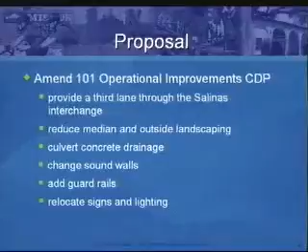This proposal is to amend the Highway 101 Operational Improvements Coastal Development Permit. This project is otherwise known as the Milpas to Hot Springs project. This amendment would provide a third through lane through the Salinas interchange. It would also result in a reduction in median and outside landscaping. Concrete drainage would be undergrounded and culverted with the project, and sound walls adjacent to Salinas Street would be changed as part of this project to provide for appropriate sight distance. The project also involves new guardrails and relocation of signs and lighting.

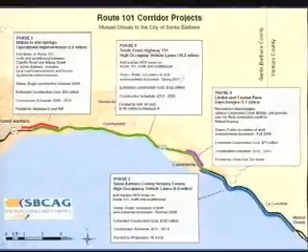The Operational Improvements Project is the first of 4 projects that would lead to the eventual 3-laning of Highway 101 between Milpas Street and Mussel Shoals. The other project within the city's jurisdiction that your commission was briefed on previously is the High Occupancy Vehicle Project, or HOV project. This project extends in the city's jurisdiction to Olive Mill, and there is overlap between the Milpas to Hot Springs project and the HOV project. Much of that overlap would be addressed with this coastal development permit amendment.

A contentious aspect of this project has been the reduction of landscaping from the approved project. The median planting would be reduced for about 0.43 miles. The approved project has a 10-foot median, from the outside of the barrier face to the outside of the other barrier face. That width would be narrowed as part of this project, in the smallest section down to 3 feet 3 inches. Accounting for the actual width of the barriers, it's approximately 2 feet 8 inches between those barriers. The project would also result in the removal of 3 oak trees and 2 eucalyptus trees that are part of the approved landscape plan, and reduce shrubs along the sound wall.

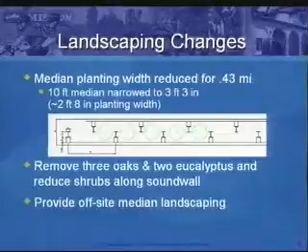Benefits of this project include furthering the city's goal of congestion relief on Highway 101. This congestion relief would occur 5 to 10 years sooner with this project than it would with the eventual successor HOV project.

The subject project would also reduce construction impacts to this section of 101, because the section would not need to be revisited with the HOV project. Also, according to Caltrans, there would be significantly reduced overall costs, and there are currently additional funds available to do this work now.

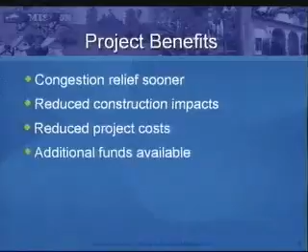In order for your commission to approve this amendment, there are coastal development permit findings that you would have to make: that the project is consistent with the policies of the Coastal Act and all policies of the city's local coastal plan, implementing guidelines, and provisions of the municipal code. I'll briefly cover three pertinent policy groups that were also covered in the staff report.

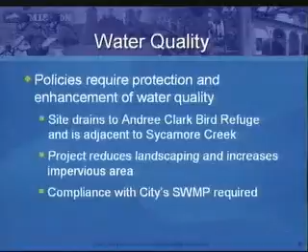The first is water quality. There are policies in the Coastal Act and the local coastal plan that require protection and enhancement of water quality in the coastal zone. This project site drains into the Bird Refuge, and it's also adjacent to Sycamore Creek. The project would result in a reduction of landscaping and an overall increase in impervious area, but staff believes that compliance with the city's stormwater management program would ensure compliance with these policies.

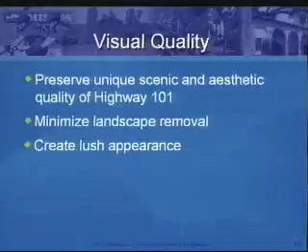The local coastal plan also includes several policies related to visual quality that are specific to Highway 101. They are to preserve the unique scenic and aesthetic quality of 101 in general, also minimize landscape removal, and create a lush appearance.

I just wanted to backtrack to the coastal access policies. There are policies in the local coastal plan, and also the circulation element and pedestrian master plan, that offer guidance to provide a new pedestrian access across this segment of Highway 101, essentially between the east side and the zoo. Both Caltrans and SBCAG have expressed support of providing access at this location, and SBCAG is committed to seeking funding to study a pedestrian crossing at this location.

So returning to visual quality, the Highway 101 Coastal Parkway Design Guidelines were adopted by the city to implement the local coastal plan. The stated intent of the design guidelines is to maintain Highway 101 consistent with its historic character and allow necessary traffic and safety improvements. It does provide a lot of guidance on landscaping and requires that a design review team review any projects within the coastal zone that are in the 101 corridor.

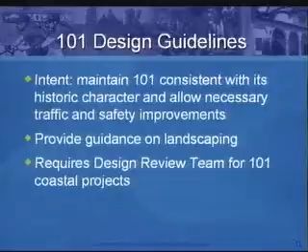For this project, a design review team was formed, including members of the Planning Commission, Architectural Board of Review, and Historic Landmarks Commission. The design review team reviewed the project on November 9th. There was a site visit on November 17th and another review on January 12th. The consensus of the DRT for the project they reviewed was that the reduction of landscaping was not acceptable, and that a wider median was necessary to support the appropriate plantings. Members also expressed concern regarding the reduction of the outside plantings.

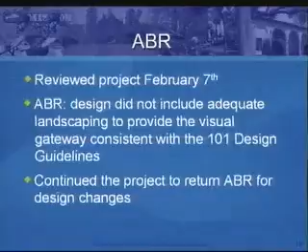This project is in the jurisdiction of the Architectural Board of Review, who reviewed this project once on February 7th. ABR stated that the project didn't include adequate landscaping to provide the visual gateway consistent with the guidance of the 101 design guidelines, and continued the project on a 7-0 vote back to ABR. Due to time constraints on the project, Caltrans has elected to proceed to your commission before going back to ABR, but has added plantings adjacent to the sound wall and has also proposed off-site median landscaping improvements. ABR and the design review team have not reviewed those changes.

So the difficulty is essentially that there are two ways to provide additional landscaping in the right-of-way. One is right-of-way acquisition, which Caltrans has said is not feasible due to the constraints of this section of 101. Union Pacific right-of-way abuts the Caltrans right-of-way, and there is low-income housing in the trailer parks adjacent to Caltrans right-of-way on the other side.

The other way to provide additional landscaping is Caltrans approving design exceptions like narrower shoulder widths or lane widths. This is an internal process at Caltrans. Caltrans has recently stated that design exceptions are not available for this project at this location due to concerns about worker safety.

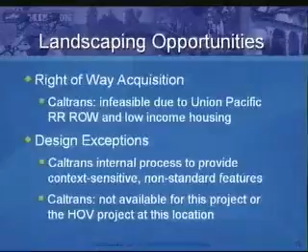Staff has had trouble reconciling this information with the visual policies and guidelines and direction by the design review team and ABR. So staff is therefore not making a recommendation on this application either way.

Staff does believe there's sufficient information for the Planning Commission to act on this application, and approval findings, including CEQA findings, are outlined in Exhibit A of the staff report. Denial findings are also provided in Section 8 of the staff report.

Briefly on environmental review, for the operational improvements project, Caltrans is the lead agency. The EIR for the operational improvements project was certified in March 2004. There was an addendum prepared for project changes before the city took action on the project in December 2004. For the subject project, Caltrans prepared an addendum in February.

That addendum found that there are increased wetland impacts from culverting the concrete drainage ditch. Essentially, the ditch filled with some silt and some wetland plants started growing in the drainage ditch. It was not intended to be a landscaped drainage. So the mitigation would be 1-to-1 at some location along Sycamore Creek, and the area is approximately 800 square feet.

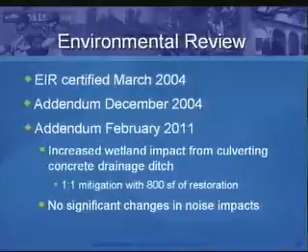Exhibit A also includes staff recommended conditions in case the commission chooses to approve the project. They include a condition for wetland mitigation, compliance with the city's stormwater management program requirements, landscape maintenance in perpetuity, and a requirement for design review submittals for the off-site median landscaping improvements.

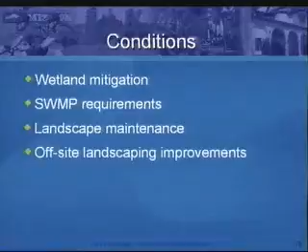Unless Mr. Cato or Mr. Dayton have anything to add, that concludes staff's comments. We have members of the design review team. Phil Suding is here and Judy Arias is here, representatives from the Historic Landmarks Commission. Also, I believe Paul Zink is here representing the ABR. And for the applicant, Greg Hart is here from SB CAG. David Beard is here from Caltrans, he's the Caltrans project manager. And Dave Emerson is the Caltrans landscape architect, and they will be presenting for Caltrans.

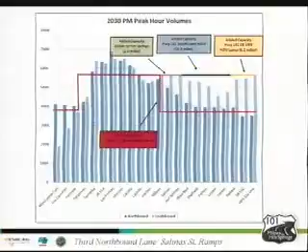This chart shows the intersections that connect with the freeway. On the far right-hand side of the chart, over here is the Ventura County line, and out here is Winchester Canyon, Goleta. Each of these are the various intersections in the north and southbound direction, and this is the capacity of the freeway, the red line.

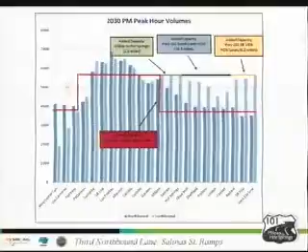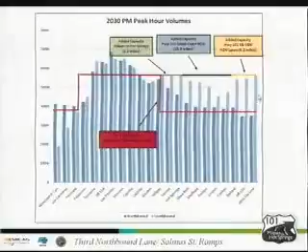There's 2 lanes out in Goleta coming back toward Patterson, goes up to 3 lanes to the city of Santa Barbara, and then down to 2 in Milpas. You can see all of this traffic volume here that's above the 2-lane capacity will create the queue I was talking about. It doesn't need to occur in all of those sections - all it has to do is occur at one point in space, and you get a bottleneck that backs up through the entire corridor.

So what we're trying to do is provide capacity to accommodate that, and that's what this additional third lane is intended to do. Even out in 2030, with traffic volumes, you can see this will do a very good job of addressing it, but it isn't sufficient by itself.

We went through a very, very long process with the community through the 101 in Motion planning effort, where we came up with a consensus that determined we needed to widen the freeway with a carpool lane - not just any lane, but a carpool lane to facilitate transit and carpool usage. But we also have to invest in rail transportation and interregional transit, and we'll talk a little more about that later. Frankly, those strategies are particularly important for this section.

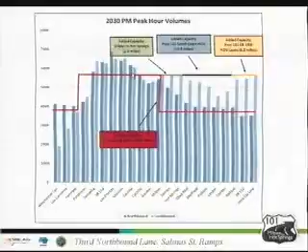We do not have a capacity solution for the congestion that's going to grow within the city limits itself. We have to treat that through alternative transportation, and the carpool lane is really the linchpin of that effort. Dan touched on this very quickly.

The project you're looking at today is a subset of item number 4, the fourth phase of our overall strategy to widen the freeway. The first phase is under construction, scheduled to be completed about the end of this year - it's the first 2 miles from Santa Barbara down to Montecito.

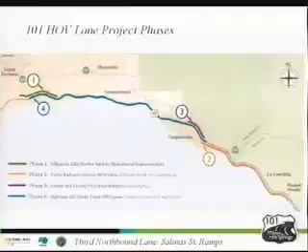The second section is actually going to begin construction later this year as well. That project's been fully funded. All the permits have been granted from the Coastal Commission, the City of Carpinteria, and the County of Ventura. It's about a $130 million project.

We'll begin down at Mussel Shoals and add a carpool lane. For the first time, this is where you'll actually see the diamond lane on the freeway, coming all the way up to Carpinteria Creek. The next phase is in Carpinteria itself.

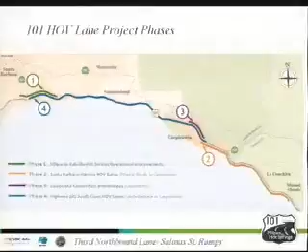It's phase 3. We have to replace the Linden and Casitas Pass overpasses in order to accommodate the additional freeway lanes into the freeway. One of the things we are trying to do is take what we think are going to be cost savings from the second project.

The bid environment is actually pretty good right now because of the recession, so we think we may have as much as $20 million in savings on that project. We're hoping to get permission from the California Transportation Commission to apply those cost savings to Carpinteria, taking advantage of another opportunity to make sure that project is fully funded and staying on track.

We're going to be getting permits from the City of Carpinteria hopefully later this year. All the environmental work is done, and that project is queued up to begin construction about the time when Phase 2 finishes.

So then we're left with the big, long 10-mile section, essentially from Carpinteria back up to the section we're looking at, too. You can see the blue line overlaps with the green line up here in the city of Santa Barbara because we have to come back for the Salinas Ramps project. So what we're hoping to do today, with your permission, is get approval to do that section so that we don't have to come back and redo that work at a later point in time.

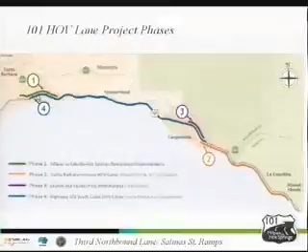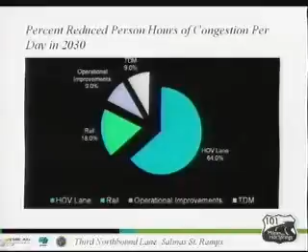I mentioned briefly that this strategy is part of a multimodal solution to the congestion on the freeway. The HOV lane produces about 65% of the benefit we're going to need from a traffic reduction standpoint, primarily because we're able to use carpools, van pools, and the interregional bus system we have in place will be able to use that lane.

Right now today we have the Coastal Express bus service that operates between Ventura County and Santa Barbara County. About 300,000 people a year use that service. It's very successful - there are more than 40 lines that run throughout the whole day and on weekends. Having that carpool lane in place for use by these interregional buses is really important for the long-term success of that. People are interested in commuting that way.

They want to save money, but if there isn't a time savings from having a carpool lane, it isn't nearly as attractive as it would otherwise be.

We're also working with MTD right now to expand that service. We're going to have a proposal going to the MTD board to add 4 additional peak hour buses that would operate as expresses coming directly from Ventura County locations to South County locations in Santa Barbara during the peak hour. And we hope to expand that more as we have more Measure A funds available.

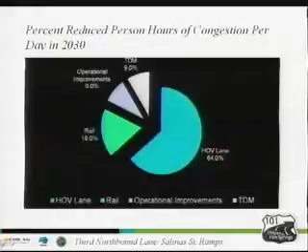We've been working with California Division of Rail. They actually are the folks who operate the Amtrak trains in California, and they provide the funding to operate the Surfliner. The city of Santa Barbara had the great idea to try and retime the existing train that comes into South County. It gets in about 10:20 in the morning and really isn't practical for commuters to use. But we're hoping to have that train retimed to arrive during the peak traffic hour in the morning. And we've gotten very encouraging news from the Caltrans Division of Rail. They're very supportive of this, would like to see this happen.

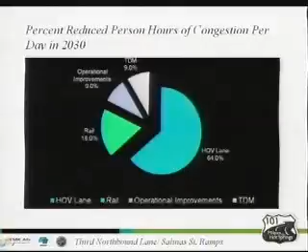Right now we're working with Metrolink and Union Pacific on some of the operational issues, trying to work through those. In addition, there's a new executive director of the LOSAN, which is the San Diego to Los Angeles to San Luis Obispo rail corridor. That person was involved in operating the Capitol Corridor trains up in Sacramento, between Sacramento and the Bay Area, and he's got some ideas about dedicated commuter service that might start in Moorpark or Montalvo and come up to Goleta. So we're also looking at those.

On the TDM side, SBCAG Division of Traffic Solutions, which operates our commuter services program, just recently got a federal grant to initiate a dynamic ride-sharing program, sort of a mobile ride-sharing connection process that you would use on your phone. It's one of just a handful of grants around the country, but it's going to be tested here in the 101 corridor as an opportunity for people who aren't necessarily taking a regular commute trip that would take a carpool in an organized way, but are interested in carpooling on a day-to-day basis. So they can use their mobile application, identify other people who are traveling in the corridor at the same time, and then link those two people into a carpool situation.

So there's a lot of things going on in the corridor in addition to the 101 widening, but the linchpin for carpools, for van pools, for transit is construction of the 101 freeway. So we'd like to see that happen as fast as possible so folks can benefit from the congestion reduction. I'll stop there. If you have any questions, I can do it now or later.

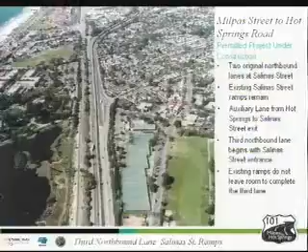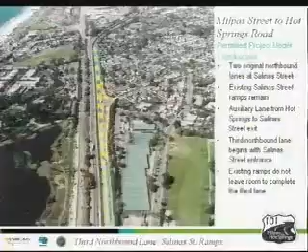Just for context, I want to talk a little bit about the project that was already permitted. This is a view looking northbound. First of all, the project currently proposes to keep the two existing northbound lanes and the two existing Salinas Street ramps, the on-ramp and the off-ramp. Leading up to it from Hot Springs would be an auxiliary lane shown in blue there, where people would have to exit. And then leading away from the on-ramp, leading further north up and over Milpas would be the third lane that's proposed as part of the Milpas to Hot Springs project.

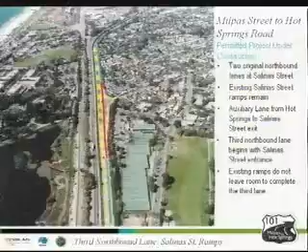Now, as you see from that red line, the current design does not leave room to extend that third lane and close that gap at the Salinas Street ramps. So a change like that would be something additional we have to look at.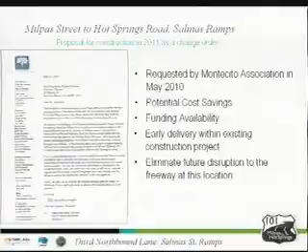So last spring we received a letter from the Montecito Association, and they pointed out what they saw as the benefits of doing the work to complete that third lane sooner rather than later. Benefits including motorists would enjoy the increased capacity and better traffic flow sooner rather than later, and cost savings most likely to result as well.

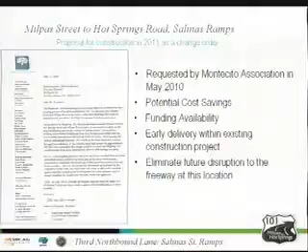And so we embarked on this change to the project as a result. So the proposal now involves continuing that third lane from Hot Springs, where it begins, past the Salinas Street ramps, and then continuing northbound.

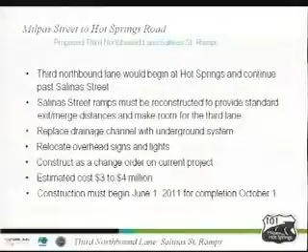In order to do that, the Salinas Street ramps that are there currently would have to be reconstructed to make room for that to happen. We'd also have to replace the concrete drainage channel that's there now with an underground system and take advantage of that room, and relocate some of the overhead signs and lighting that was installed, as well as the drainage channel.

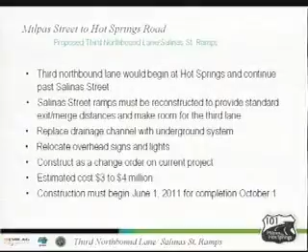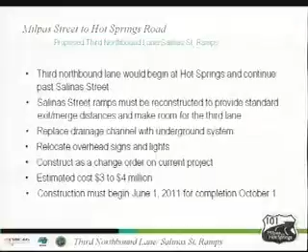It would be constructed as a change order on the project currently being built, using the contractor we have on site, at a cost of $3 to $4 million. And it would have to begin June 1st in order to take care of the summer construction season, both for constructability and permitting reasons.

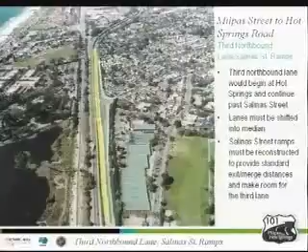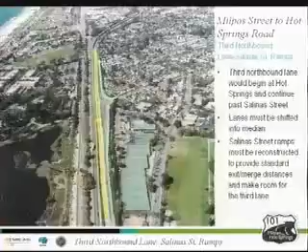The proposal here would be to have those two northbound lanes shown in yellow, a third northbound lane shown in blue, and then in light blue, the reconstructed Salinas Street ramps, which would have to be built closer to the sound wall that was completed. That's the reason we'd have to reconstruct the concrete drainage ditch, and also why the northbound 101 lanes would have to be shifted to the left into the median of Route 101 to make room for the extra lane.

There'd be real benefits to the public in having this third lane open now rather than much later with the HOV project that Mr. Hart spoke about. The northbound 101 at Salinas Street is the most heavily traveled portion of the two-lane section there, so it would represent the biggest bottleneck to be overcome. We'd be eliminating that this year instead of many years from now.

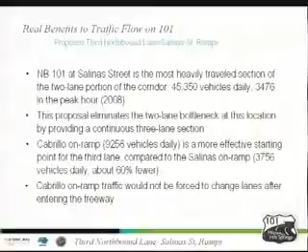Also, the Cabrillo on-ramp is really a much more heavily used ramp, and therefore a more effective place to start the third lane in the near term, before the HOV project comes along. As the Montecito Association letter pointed out, people entering from Cabrillo would then not be forced to merge immediately to avoid being forced to exit at Salinas Street. They'd be able to enter on that third lane and remain there.

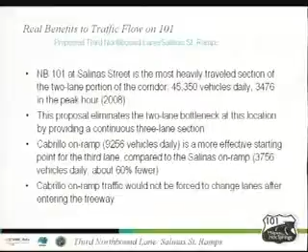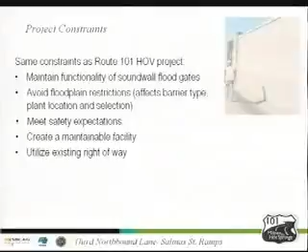So we have a lot of constraints to overcome in order to complete this work. For example, the sound walls have already been completed with floodgates on them because this whole area is in a flood zone, and that flood zone encompasses really the entire project we're talking about here at Salinas Street. So we have to design this improvement while keeping those gates functional, and we also can't incorporate any other big restrictions in the floodplain.

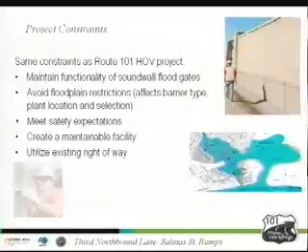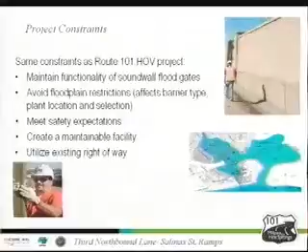We also need to meet safety expectations for the motoring public using these brand new ramps and lane. We also have to create a maintainable facility for the safety of those Caltrans folks who are out there working hard every day to keep the freeway operating and safe. And finally, the constraint to use our existing right-of-way was mentioned before.

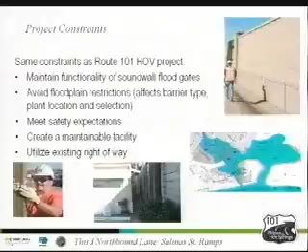You shouldn't think of it as just purchasing property. There are people living immediately on the other side of the wall, low-income housing, very dense housing as well, and so displacing them would be extremely difficult to do. And of course, on the other side of the freeway we have the railroad, which is also a very tough constraint to overcome.

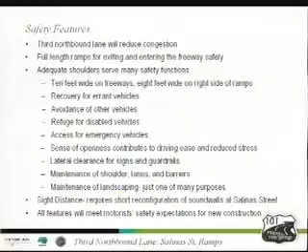Now, this project incorporates a lot of important safety features, and I wanted to mention them because the issue of design exceptions always comes up. The third northbound lane will definitely be a way to reduce congestion, which could potentially reduce rear-end collisions and other types of collisions on the freeway. Also, the new ramps we're proposing would be the full lengths required for exiting and entering the freeway safely, which is important considering this is a very busy segment.

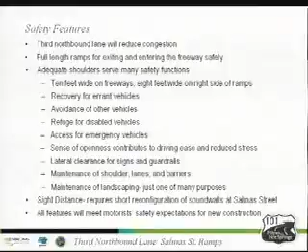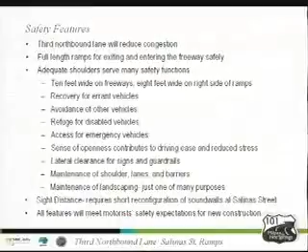And then the adequate shoulders serve a lot of safety functions, not just for workers, but also for the motoring public—for example, the recovery area for people who run out of their lane, the ability for emergency vehicles to get to accident sites, and providing lateral clearance to things like signs and guardrails so that they're hit less often. And of course, we use the shoulders for maintenance of the pavement as well as the landscaping, which is definitely not the only reason, but one of many.

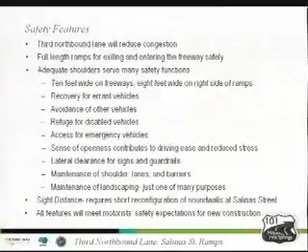Also, I thought I should mention sight distance, in other words the view around the corners, and that's the reason for the modifications we're proposing to the sound walls right at the ends where Salinas Street connects. So all these are intended to meet motorists' expectations for new freeway construction.

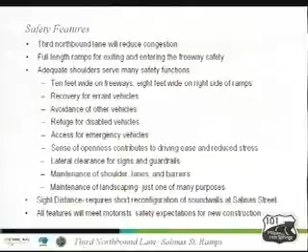We completed environmental studies of this additional work in order to back up the original CEQA document and revalidate it for use here. We didn't identify any new impacts. Any that we did find could be mitigated on site, and through speaking with the various resource agencies, we were able to establish that we can continue to use the original permits or amend them with the conditions still in place.

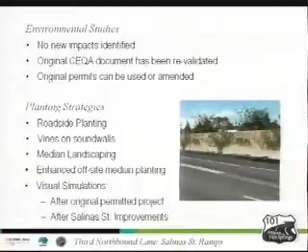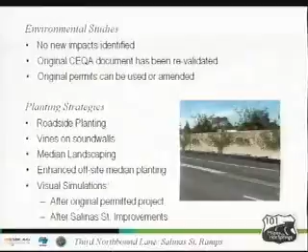Now, I know planting is a very important issue with this project and in the community in general, and I have with me Mr. David Emerson, our landscape architect on the project. He'll take you through the next few slides to describe how we address the issue of planting, and then I'll return. Thank you.

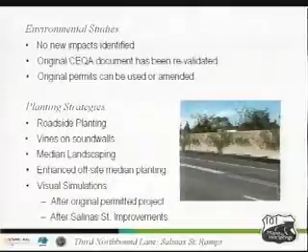Since the concrete U-shaped channel is being removed from in front of the sound wall on the northbound off-ramp, we're able to plant vines on that sound wall as well, so the net result is an increase in vines on the sound walls. The median landscaping has become narrowed, but we're still able to fit planting throughout the whole continuous project limits.

If I could take a moment to describe how the planting is currently planned: from the beginning of the project to Sycamore Creek, or about the beginning of the tennis courts, the existing planted median is 10 feet in width. It stays at 10 feet until it gets to the Salinas Street off-ramps, and from that point it tapers to 6 feet to conform to the railing on the bridge over Sycamore Creek.

The current proposal would change that, beginning at 10 feet by the tennis courts, immediately tapering down to 6 feet just before Salinas Street, continuing at 6 feet for about a third of that length. Then for the last third, it tapers down to 3.25 feet and back up to 6 again. So it's not a continuous length of the whole project at that reduced width.

I also have some slides talking about enhanced off-site median planting opportunities that we think are a good solution to help offset some of the increased alterations to the median. I've got some visual simulations which should help you get an idea of how this will end up looking.

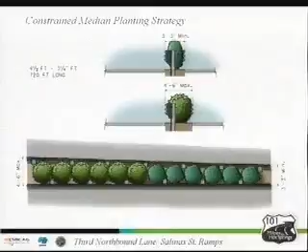This is a slide of the most constrained portion of the median. This is the part I've had challenges with in the past. It's 4.5 feet at the widest, down to 3 feet 3 inches, and this continues for about 720 feet, starting at 4.5, tapering down to 3, and then back up to 4.

The two sections give you an idea of how that works with the elements out in the roadway. It shows the distance, as Daniel pointed out, ends up being about 2 feet 8 inches between the two barriers. This shows how the post is actually a portion of the whole metal beam guardrail assembly: there's a post, a block, and then the beam assembly. So when those are offset, as you can see in the plan view, the plants can be tucked in between the post elements.

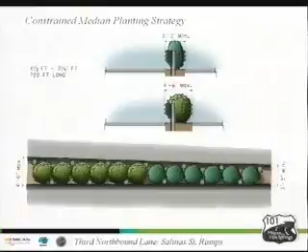This also shows that as the median narrows, we have to change plant material, ending up utilizing plant material that is columnar in nature and also goes along with closer on-center spacing to provide as high a vegetative break as we can.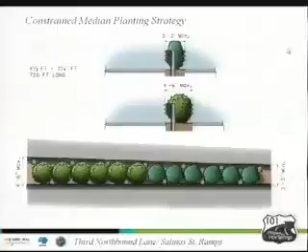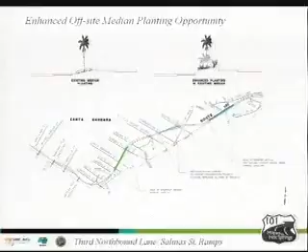The next slide shows the enhanced off-site median opportunities. You'll see the blue is the area of the reduced median as a result of this change order, and the green is an area we've identified as a potential opportunity to enhance the median.

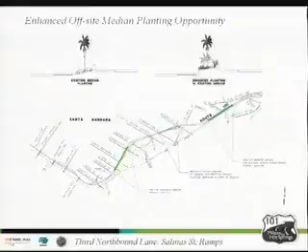That's a 10-foot wide section of median between Laguna, or closer to Garden, and extending just beyond State, just northbound of State Street. That's a barrier right now which has the adequate width to perform the necessary requirements of the coastal design, parkway design guidelines, but is currently not able to do that because the shrub planting in there is quite low, and the soil level is also low.

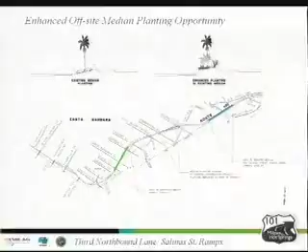So you're seeing palm trees currently, but you're essentially looking right through onto oncoming traffic. With an opportunity like this, we can raise the soil level between the palm trees, plant additional material, and provide some relief.

We can achieve essentially a well-planted, screened, vegetated median in the downtown core. You'll also see the cyan color, the light blue area between Milpas and Quarantina. That's an area of planted median currently experiencing some dieback due to an accident in construction, where some valves were hit and some wiring was damaged. That's going to be replaced as part of the construction project.

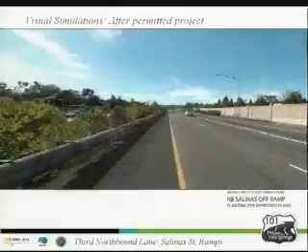So here are the visual simulations. This is the northbound at the Salinas off-ramp. This shows the median in its current permitted condition, about 10 feet wide. The planting is shown generally about 5 to 7 years after planting. That gives us the most representative conditions without being overly cautious or overly optimistic, showing plants at a decent size but not trying to oversell the project.

So here we see the full median and the planting on the northbound shoulder at the off-ramp, with a portion in the foreground which is not landscaped. That's a pull-out area created to allow maintenance to maintain the channel. You'll see the after condition, and you'll notice no vines on the sound wall either. In the after condition, the median planting becomes lower, the median gets smaller, the lanes have shifted over, but now since the concrete channel has become undergrounded and over in the shoulder, there is room to plant behind the guardrail and to plant vines on the wall.

So the planting conditions are about the same on the outside shoulder as they would be in the median at this location, but we have the addition of vines, so we get a layered effect - low shrubs behind the ground cover and then the vines on the wall.

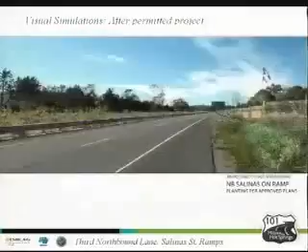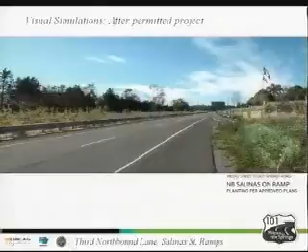This is a simulation at the on-ramp. This shows the planting in the median as it's currently permitted. It switches from a toyon to a petite pink oleander. This is where the existing median starts to narrow, begins its taper, and you'll see Salinas. It's hard to make out, but Sycamore Creek bridge is in the distance, and that's where it ends its taper.

So the vines in this location are trained up on wire trellises up and over the sound wall gate, the flood wall gates, which are there to provide relief for floodwaters. There's a row of shrubs in front of that and a brief section of guardrail.

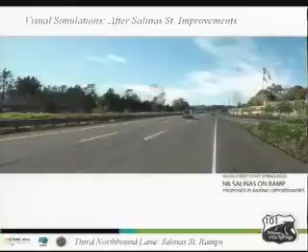The after condition: the planting has moved over, the lanes have moved over rather, and the planting is reduced. We're still able to plant in this triangular area between the on and off ramp, still able to maintain the vines on the sound wall, and there is room for some small planting also behind the guardrail.

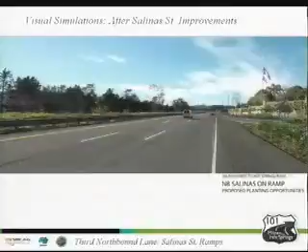We also have some area identified in the distance where tall palm trees would be able to grow, similar to the sort you'll see in the 6-lane section and through Summerland. They maintain a height above the sound wall, providing another layer of vegetative relief in front of the sound wall.

And that concludes my portion of the presentation.

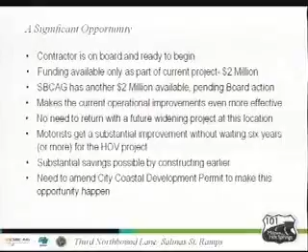Thank you. So I just wanted to express that this is a significant opportunity right now to respond to the community requests we've heard to expedite this portion of the widening of 101. We have a contractor currently on the site we've spoken to who is ready to begin the work. We have some funding available as part of the current project that wouldn't otherwise have been available, $2 million worth.

SBCAG has been able to offer another $2 million pending their board's action to make sure the project's fully funded. So this, we believe, would make the current operational improvements project even more effective, and we wouldn't have to return later with a future widening project at this location.

Motorists would get substantial improvement in traffic flow very soon instead of waiting 6 years or more for the HOV project, and we should expect substantial savings in construction costs by building it sooner. So we need to get this amendment to the city coastal development permit to make this opportunity become a reality.

In closing, I want to express my appreciation to the staff both at SBCAG and the city of Santa Barbara for helping make this happen, this permit process, in a very short time frame. I know it's been a lot of extra work for them, and I really appreciate it.

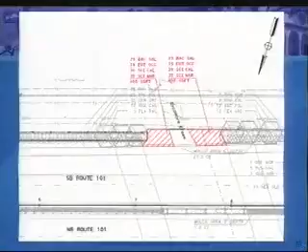And then conceptually, in the big picture, I was wondering, do they have to go ahead and mitigate at that particular spot, or could they, say, give money in lieu of mitigating to Creeks Division to work on a bigger picture restoration in Sycamore Creek at a later time?

We haven't explored that. Mr. Cato or Mr. Vincent might have comment on in lieu fee as mitigation.

Part of the reason why an addendum is appropriate for this project is that the wetland impact has been identified before, and there was a mitigation identified before, and this mitigation is similar to that one.

I guess the only reason I bring that up is that Sycamore Creek is an active zone of concern for our city's efforts, and we're just finding an 80 by 10 foot spot to mitigate. How does that fit into the big picture, and could the efforts be better made somewhere else if it was done in concert with the city's program? It's more of a statement than a question, so I'll just leave that thought with you.

Thank you, Mr. Chair. Thank you, Mr. Jordan. Ms. Lodge, further questions? Yes, Mr. Chair. Mr. Hart, you said that

Caltrans can't buy right-of-way on the railroad side. Is that because Union Pacific won't sell? Yes, that's the reason. I shouldn't have said can't — it's just we don't have a willing seller. And we've had a lot of experience working with the railroad that hasn't been helpful in that regard. Thank you.

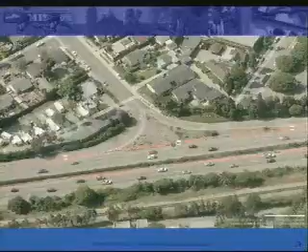Exiting RVs currently exit right there. You can see the exit close to Salinas. With the reconfiguration, it appears RVs are going to have to swing out and possibly into opposing traffic to be able to exit and get onto the freeway, as they've been doing for years, but this reconfiguration creates a new hazard. To avoid this hazard, RVs are going to end up traveling through the residential neighborhoods next to the freeway, resulting in traffic noise, air quality, and other impacts that haven't been considered.

We also have the loss of landscaping that we've heard about. Aesthetic impacts from proposed changes to landscaping and the noise wall have not been adequately analyzed. The changes constitute a significant aesthetic and land use impact. They also do not comply with local aesthetic policies or procedures, and as we just heard, they're not approved by the ABR or the HLC.

Could you wrap up, please?

Okay, quickly. The proposed additional landscaping near Laguna Street still must be reviewed by ABR and HLC, so it's unclear if anything would ultimately be approved. That constitutes deferred mitigation, and any mitigation should be one-to-one. The mitigation proposed is not sufficient. The new landscaping, blue gum eucalyptus and oaks, don't grow well together. Eucalyptus are a major fire hazard and can be blown down easily. This hasn't been analyzed.

Staff acknowledges issues regarding the modification in the landscaping and suggests changing findings and conditions, but they don't make clear what those changes would be, and there's no adequate opportunity for the public to comment. The wetlands impacts have new mitigation, but there's not sufficient opportunity for us to consider and review, as we would have had with an EIR. As for growth-inducing impacts, there's been no analysis about how moving up the timetable 5 to 10 years will result in growth-inducing impacts.

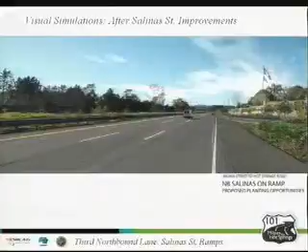In this simulation, what's the width of the median at that point? That's the 6-foot median right there. 6 feet? Okay, and so how long again is the section where it's a lot less? I think it's 720 feet. And during that 720 feet, the width is varying from 4.5 to 3, back to 4.5. So the 3.25 is just a moment, just the very minimum, and it's constantly changing. So that's where it pinches down, and then it flares back out. Does that answer your question?

Okay, yes, so it's about a half mile of in and out. You said 700 feet? Yeah, so a little more than a tenth. Well, that's not quite so bad as it's all being the narrowest part. Because I'm also concerned about, in that narrow part, I believe it was Mr. Suding who brought up the point of how are you going to get a shrub to grow there when there's so little land for it to grow in?

Well, all I can say is, as Commissioner Larson has suggested, that this come back. Can I make a brief statement, please? We have to comment that the posts were set in concrete, and that's not the case. The posts are set in soil because the intent with how guardrail functions is it's supposed to give when it's hit by a car. So as opposed to being hit, it's pulled out and a new one is driven right back into its place. And these are Thrie beams you're putting in as part of that? But the posts would be the supports for the Thrie beams, is that correct? Okay, well that makes it a little better.

Well, I guess I would hope that if the Planning Commission can't approve it as is, and it makes great sense to do this now. If it's something that's going to happen later, certainly it makes great sense to do it now as part of the existing project. I'm just hoping that there's some way that you can make some improvements to the landscaping and come back to us.